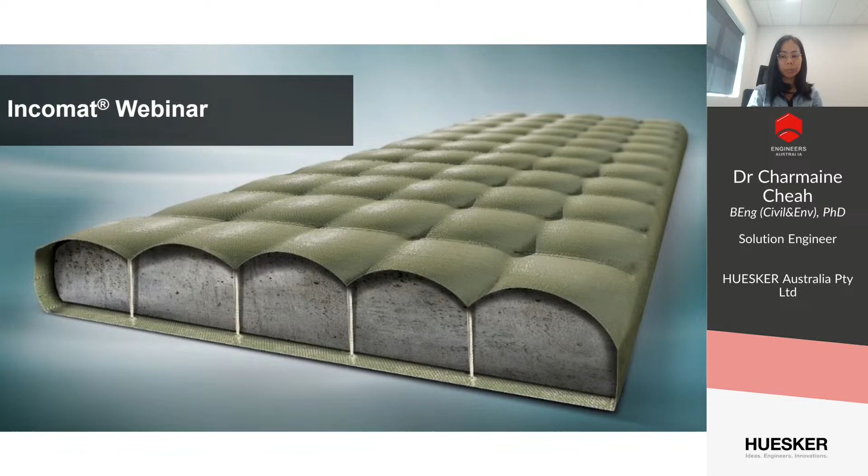So my name is Charmaine, the Solution Engineer for HUESKER Australia, and I have the pleasure to give you the first section of today's webinar for erosion, scour, and mechanical protection with geosynthetic concrete mattress.

And this is today's agenda. We will start with the basic information, explaining the different types of concrete mattresses, a brief introduction of the system, and then we focus on a presentation showing different applications with Incomat, for erosion, lining, slope, mechanical, and uplift protection. The presentation will then give some insights of Incomat projects executed around the world, followed by technical design examples. And if you have any questions, please type into the YouTube chat box.

So we do have a long-standing history with Incomat. Here you find an old book known as Plastics for Hydraulics, written by Zitcher in 1971. The book shares insights about the pioneering applications for plastics material, which now is commonly known as geosynthetics. What you see here is a concrete mattress that was produced by HUESKER in the early 1970s.

So we do have a long-standing history of more than 60 years with Incomat. Here you can see some projects from the 1970s. One of the oldest projects is the Canal Imperial that was installed in 1973. It is an irrigation canal with Incomat standard, and you can see its condition in 2000 and also in 2011.

Another old project that is currently in its service life is the Banter See in Wilhelmshaven. It was installed in 1977. As you can all see, the condition in 2008 is shown in both pictures at the bottom. So though geosynthetic concrete mattress has been installed for over 60 years, it still presents an unfamiliar construction element in the civil industry.

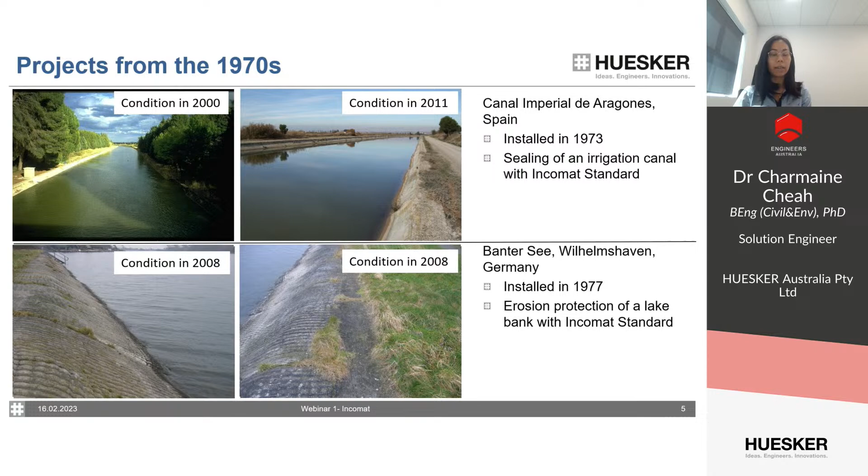So what is Incomat? As you can see, it's an in-situ concrete mattress. It basically comprises two basic components: a geotextile formwork and highly fluid concrete.

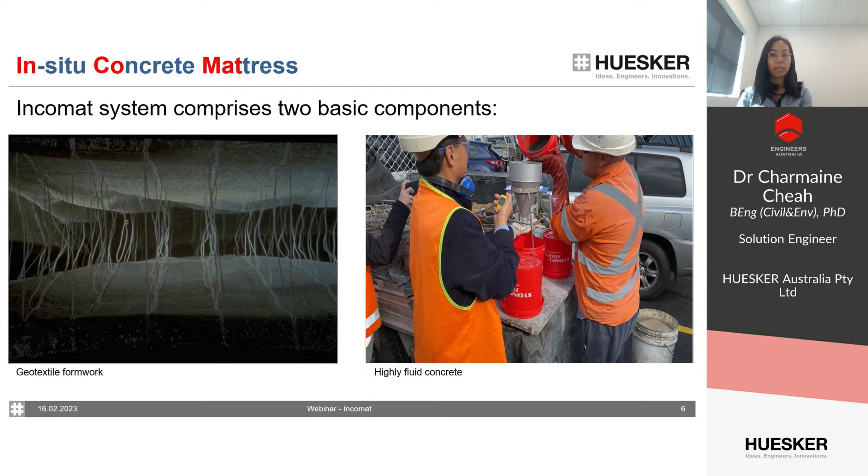What I do mean by highly fluid concrete - here you can observe the flow cone test. Highly fluid concrete is poured into the cone with a certain diameter, in this case 26 mils, and when it is released, the cone should be emptied within 5 to 6 seconds. There are different test methods to meet the criteria of highly fluid concrete. Alternatively, you can use an F6 consistency with a slump of 63 centimeters, or you can use a self-compacting concrete.

Now, you may wonder if there's only one type of geosynthetic concrete mattress. No, in fact, there are more than that. So let's have a look.

We have different mattress types. As you can see, we have Incomat Standard, Incomat Pipeline Cover, Incomat Flex, Incomat Filter Point, and Incomat Crib. Incomat Standard is the state-of-the-art lining and erosion control because it's an impermeable slab and also can provide erosion protection.

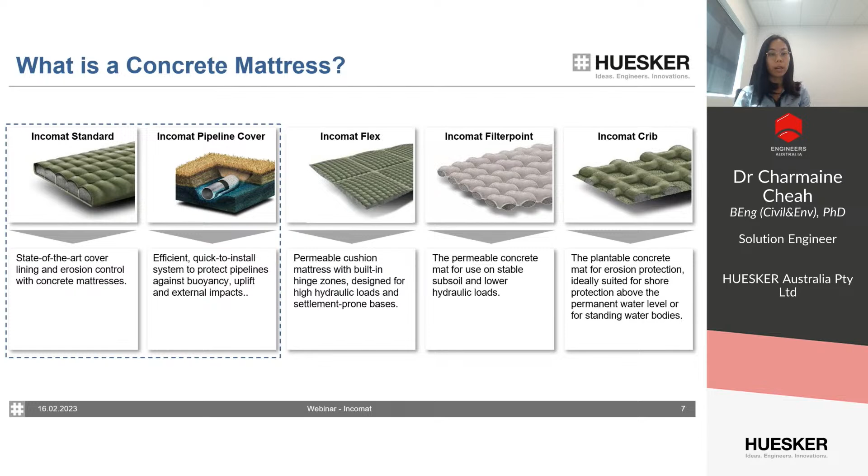Then we have the IPC system, which is made of the Incomat Standard. So we have the mechanical protection or buoyancy protection using Incomat Standard that's wrapped around the pipeline. And then we have Flex, Filter Point, and Incomat Crib. So how do we actually differentiate between the different products? Let's take a look.

There are two features mainly used to differentiate the products: with or without vertical ties. Both Incomat Standard and Incomat Flex have vertical ties which provide dimensional stability, and this space is then filled by concrete. Whereas Incomat Filter Point and Incomat Crib don't have ties, but have interwoven areas known as filter points.

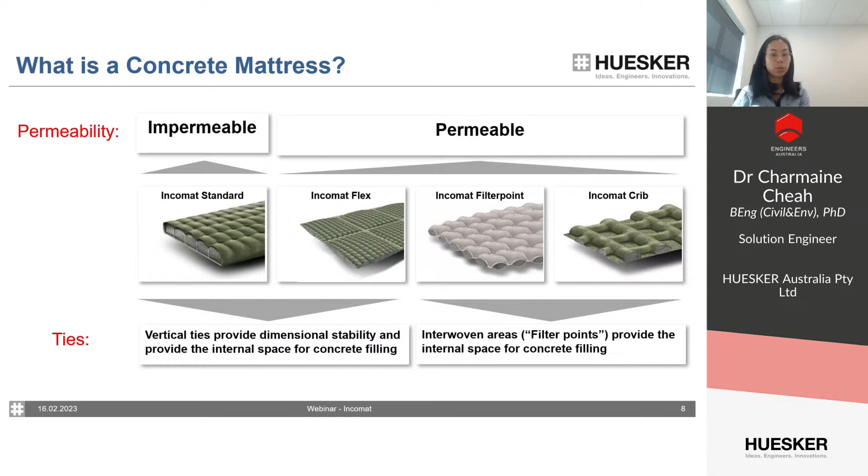Another feature that distinguishes the different mattresses is permeability. Incomat Standard is the only one that can be used for sealing. Test results show it has a permeability value of 3 times 10 to the power negative 11 meters per second, whereas Flex and Crib have filter zones which provide permeability and allow hydrostatic pressure relief.

So let's talk a little more about each product. Incomat Standard is available in a wide range of thickness, 8 to 56 centimeters. If a thinner concrete mattress is required, we are able to produce down to a minimum thickness of 3 centimeters. Incomat Standard is impermeable, as mentioned, so we usually use it for channels, irrigation canals, and ponds, as both erosion protection and sealing element can be provided.

Incomat Flex has similarity with Incomat Standard, but with vertical ties. It's in a pillow shape, as you can see, with filter point areas. It is also available 8 to 56 centimeters, but we recommend, if you have a steep slope, a range between 8 to 30 centimeters. Because if we increase the thickness more than 30 centimeters, we notice the pillow would sag. So for steep slopes, we typically recommend 8 to 30.

It's typically used for wave and flow loads, high hydraulic loads, and also for canals, slopes, outlet structures, lakes, and bank protection. Incomat Filter Point is a permeable mattress, with thickness usually ranging between 5 to 40 centimeters, typically used for canal applications, also overflow sections. It could also be used as membrane liner protection.

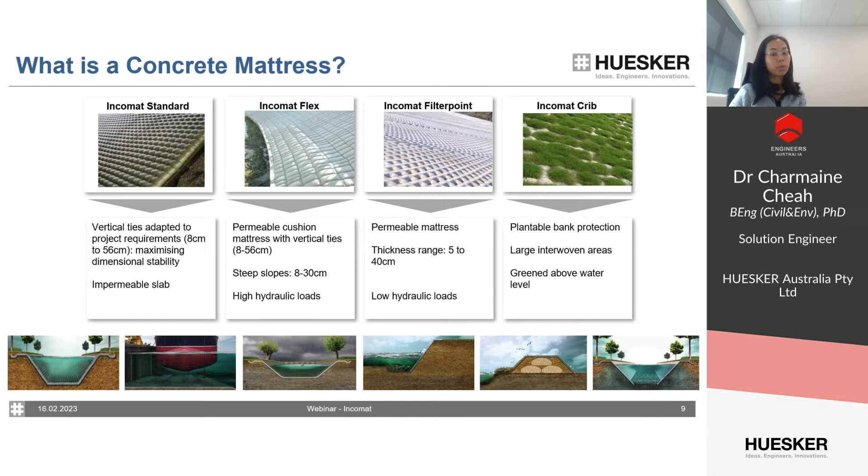The last product, which is a little more unique, is Incomat Crib. The main difference is that it can be vegetated. The large interwoven areas are usually cut off, and soil is placed into these areas. It is typically installed above water levels, and the most common application for Incomat Crib is overflow sections.

Now let's take a look at some executed projects across the world, along with some technical design approaches. First up, we have an erosion project in New Zealand, located in the central area of New Plymouth. The extent of the damage led the council to remove and replace the existing rock mattress with Incomat.

The robust filter point mattress was selected as the best alternative due to its simplicity in installation. The Incomat Filter Point was manually laid on the subgrade, as you can see. Then we used an inline concrete pump from a distance because there was no direct access for concrete trucks without significant disturbance to the surrounding vegetation. So the minimal machinery requirement for installation made Incomat Filter Point a superior solution compared to others.

Next, we have another project, erosion bank protection in the southern part of Taiwan, in Kaohsiung. It is an area characterized by tropical climate and seasonal heavy rainfall, and the existing open rainwater channel was concrete lined. Over the years the channel was subjected to erosion attack on the slopes and berms. Hence, urgent rehabilitation work was required.

Regular concrete fronting was not really sought after by the local authorities, as they wanted something more ecologically friendly as well as aesthetically pleasing. So in cooperation with the local designer, the bottom slope compound was made of Incomat Filter Point, which enabled the relief of pore water pressure. For the upper slope compound, the Crib mattress was selected because it could be vegetated.

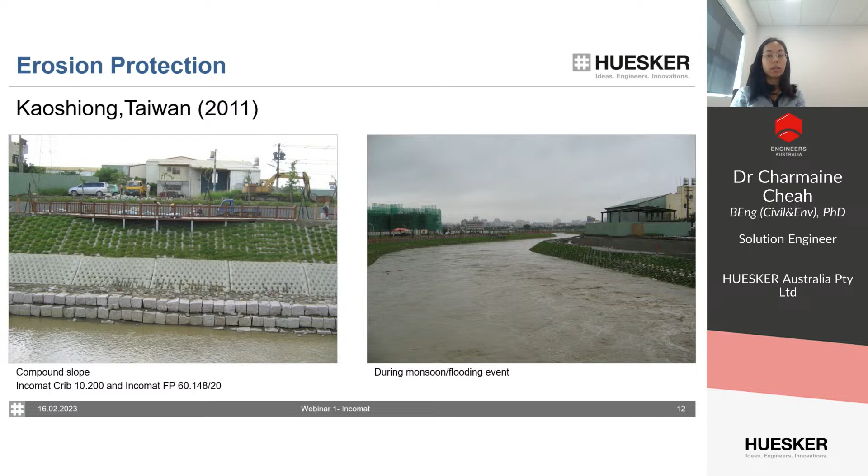During filling, you'll notice some excess concrete milk seeping through the fabric, but this actually increases the strength and durability of the concrete because there is a lower ratio of water to cement. Following completion of the first phase of the project, a typhoon hit Taiwan in August 2009, bringing heavy rainfall and causing the drainage channel to rise to the maximum, as you can see in the picture. Even under these extreme climatic conditions, the Incomat erosion protection performed extremely well.

Here we have another project done in Italy, an erosion protection system. The existing channel was subjected to weathering, and the erosion was affecting the stability of the surroundings. More importantly, the channel was often subjected to flooding, meaning it's prone to high flow rates. The project brief was to provide a constant thickness mattress that would prevent and resist high hydraulic flow. As Incomat Standard offers both sealing and erosion protection, along with simplicity to install, it was a superior solution to other options.

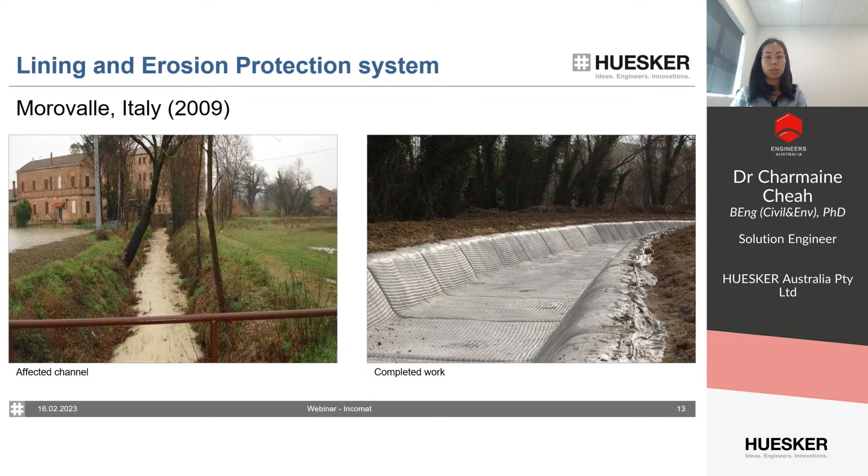So we've talked about a couple of applications of Incomat. Let's look at a design example for a canal lining. What is the required thickness for this canal? We have the flow as the input parameter, 2.5 meters per second, and we also have the dimensions of the canal. So which design method would be adopted?

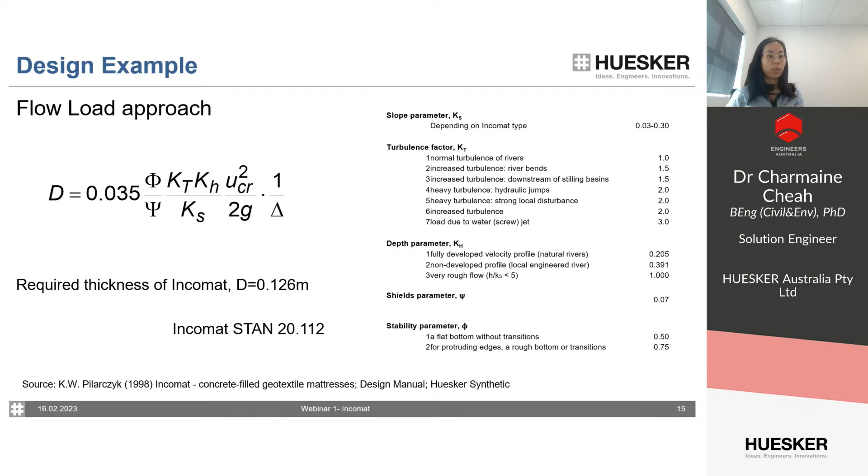Here we have a flow load approach from Pilarczyk. We need to take into account a number of different parameters, including the slope parameter, turbulence factor, depth, shield, and stability parameter. Once you've selected the right factors, you put it into the formula, and the required thickness of Incomat can then be calculated. In this case, the required thickness is 12 centimeters.

The next example here is a scour protection system for a bridge pier. The bridge you see here is actually a bridge that was completed in 1834. The suspended deck was replaced by a concrete girder in 1881, which was then replaced by a concrete deck in 1969. Note that the bridge pier still has the original elements of the original bridge.

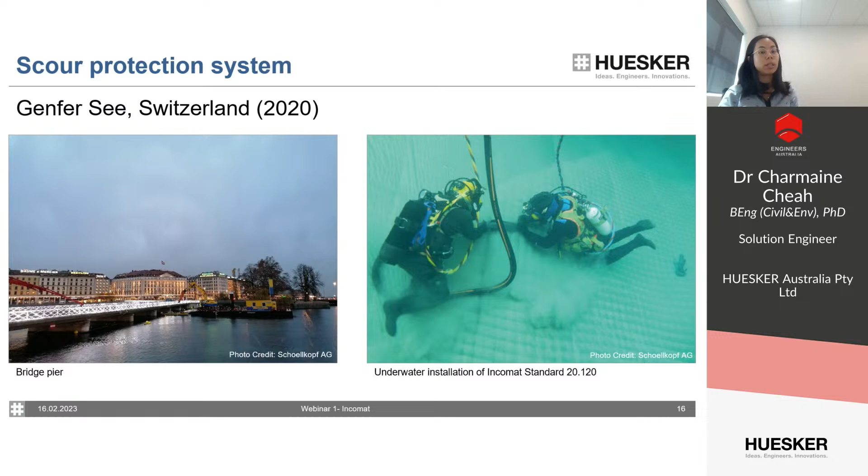Due to the high flow velocity, the riverbed area at the piers is eroding, endangering the foundation. Incomat standard with vertical ties provided a constant concrete cross-section under difficult installation conditions, making Incomat a superior system compared to other construction systems. Here you can see the bridge pier from the top, and also the underwater installation of Incomat 20.120 with two divers.

So how do we actually design a scour protection around a bridge pier? Let's look at a design example. For instance, taking a flow at 1.15 meters per second with a pier width of 5.65 meters.

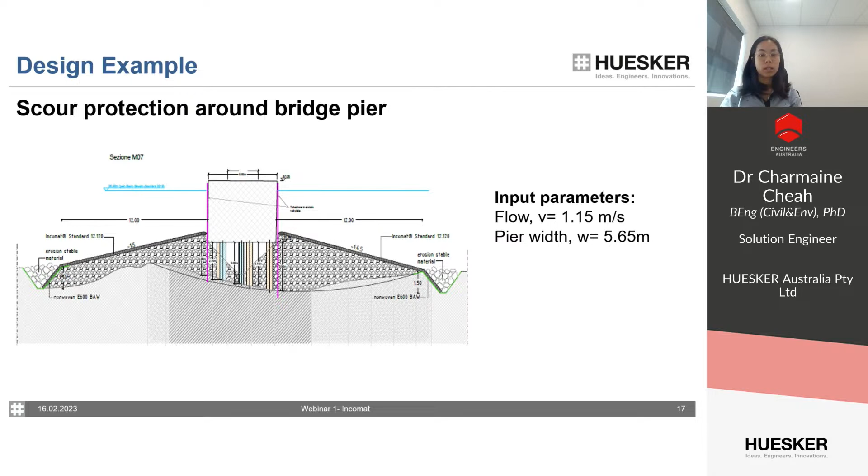This design is based on the Federal Highway Administration, FHWA. The scour protection width needed is actually 2 times the width of the pier, as given in the document at the bottom. So we know how wide we need to protect. What thickness do we actually need to design with?

Following this figure and knowing the design velocity and the stability coefficient, we can determine the mattress thickness. The flow velocity in this design was given at 1.15, and CL refers to the stability coefficient for turbulence at the bridge. For example, CL 0.23 refers to wide bridge piers, or 0.12 refers to normal riverbeds.

As you can see, because our flow rate is relatively low at 1.15, the minimum thickness is actually 200 mm. So even though the calculated value would give us less than 100 mm, the minimum thickness for bridge scour protection is always 200 mm.

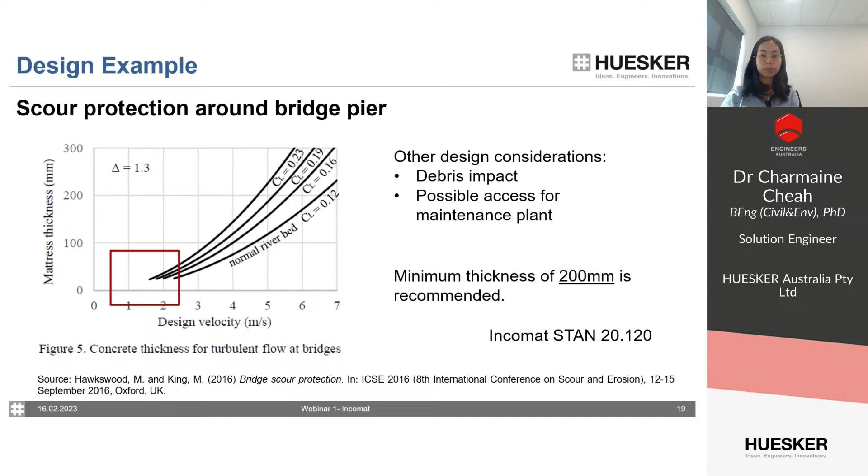Earlier I mentioned that Incomat Filter Point can be used as a membrane liner protection. This is an overview of the Qaisamani Dam. In 2016, a lining system was required to protect the dam in Lebanon. There were 3 design phases with this project.

Initially, the conventional approach was to construct a bituminous lining system, but such construction would require great effort as rollers would be needed to install the asphalt layer. In addition, given that the site is located in a cold region, the expected replacement period of the surface sealing would be lesser than the expected 10 to 15 years.

Hence an alternative approach was made to install a drainage geocomposite with an HDPE liner with granular fill. However, granular fill is not feasible, and it could be quite problematic for future maintenance and cleaning operations. So the alternative was to actually use Incomat Filter Point as a permanent protective layer.

You can see the overview of the dam, which has a volume of 130,000 cubic meters. On the other side, you can see the construction process, showing the setup of the installation with the drainage geocomposite, the HDPE liner, as well as the non-woven geotextile and Incomat Filter Point being installed on the slopes.

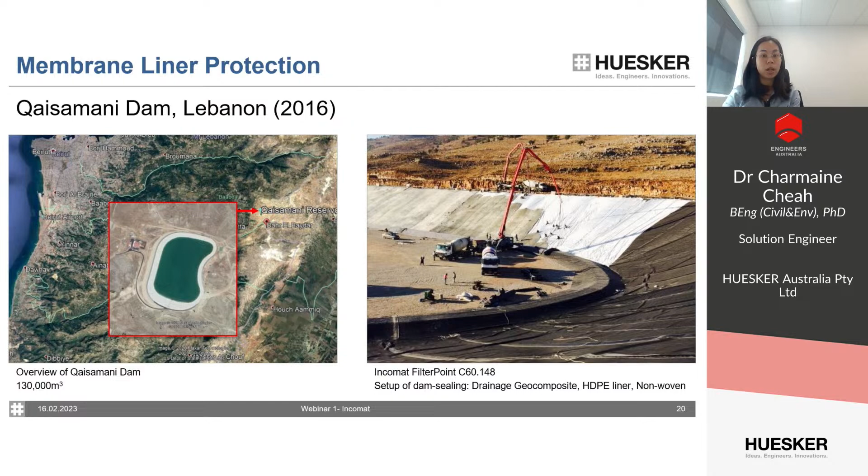Next, we have a slope erosion protection, or intake structure, done with Incomat standard. This is the largest man-made lake in Germany, 19 square kilometers, to be filled with 200 million cubic meters of water. This was created from a former open pit mine located at Cottbus in Germany. The flooding is carried out by the largest intake structure of Incomat standard with a 200 meter stilling basin.

This picture was taken during filling. As you can see, it was installed in 2017, and the first big picture shows the filling in 2019. The upper right-hand corner shows the initial phase of construction where Incomat was laid. The second picture is after the inauguration in 2018, where water was starting to flow in. The very last bottom picture is the top view of when the intake structure was completely built.

So you can see this is a very large open pit that is going to be filled with water.

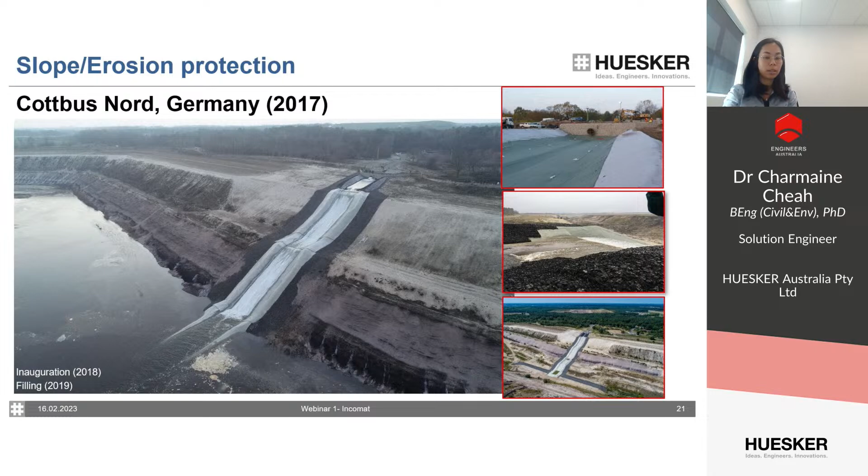So we talk about slope protection, and often we ask, what is the slope stability with or without anchoring? So following the DIN 1054,

the BAW derived minimum friction angles for subsoil for stable Incomat construction on slopes without anchoring. The results are shown in this table. As you can see, with the slope inclination, whether it's above or underwater, and what's the factor of safety being adopted, and the minimum friction angles for stable Incomat constructions without anchoring.

Also note that the friction angle of Incomat is also equal to the subsoil if the subsoil consists of loose sand, gravel, or crushed stone. Sometimes we have a non-woven geotextile that's placed under Incomat, for instance Incomat filter point or Incomat crib. Then the friction angle between the geotextile and Incomat would then be equal.

Mechanical and buoyancy protection: so Incomat pipe cover, as mentioned earlier, we have a system IPC, Incomat pipe cover, which we actually use Incomat standard to wrap around to have mechanical protection or buoyancy protection.

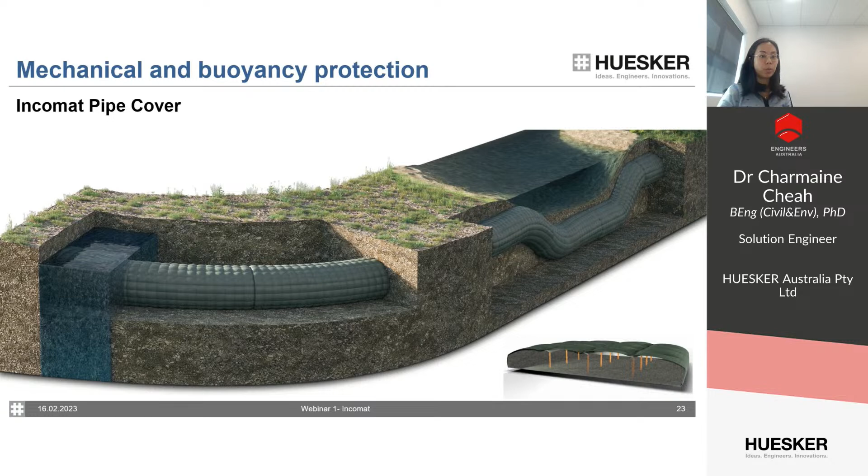Here you can see a project that was done in Germany, where IPC is wrapped around and also filled with concrete. This is a 2DN 1400 pipe for potable water installed across the River Ruhr.

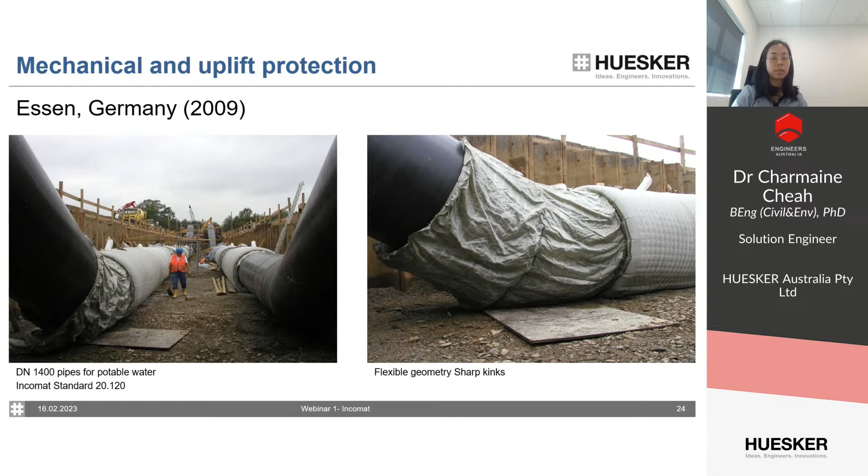For protection, Incomat pipeline of 20 centimeter thickness was chosen, and after the installation of IPC, the pipelines were floated into the river and sunk. The total pipeline that was protected was 92 meters, with a protected section of 54 meters. For the sharp corners, as you can see on the other side of the picture, customized IPC systems were installed. So next we have another mechanical protection project in France that was installed in 2017.

GRT Gas installed a new natural gas transmission pipeline between two cities in France in 2017. The pipeline diameter was DN 1200, and it was protected with IPC with a minimum thickness of 8 centimeters and an average of 10 centimeters.

So how do we actually design the required thickness for Incomat pipe cover? We need to know the input diameter, the external diameter, internal diameter, the density of the pipe, whether it's steel or HDPE, the coating if there's any coating, whether that's a non-woven geotextile, we need to know that, and then we calculate.

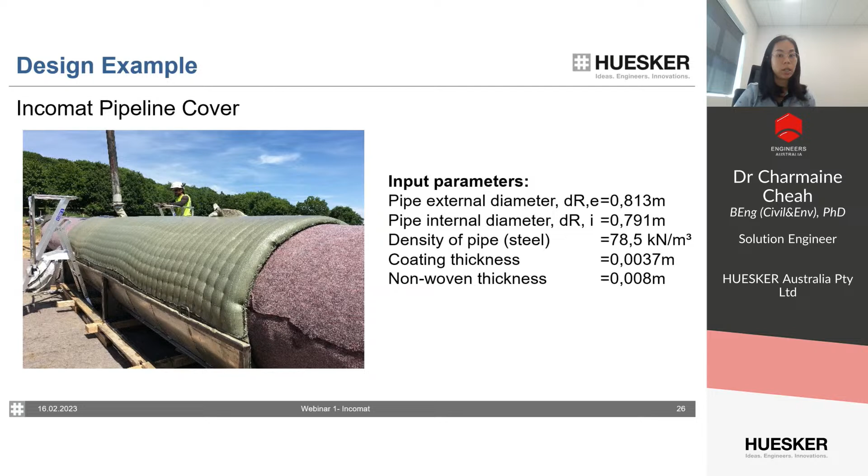An average thickness of 10 centimeters was used for this project. The required concrete weight force of the pipeline is derived by solving the equilibrium forces, so it's quite straightforward. Once you put in all the information, all your input values, you can simply calculate the value, and the required thickness is then derived.

What we're going to show you next is the preparation of how it's installed. How do you install an IPC? The filling operations of the IPC are relatively straightforward. Here is a 36-inch pipe encased with the IPC system, the pipeline is wrapped with the textile formwork, and then it's filled with highly fluid concrete through the inlets, which are sewn to the panel element.

Here you see a 5-meter element, which only took 7 minutes for installation. Obviously we won't show the whole thing, this is sped up a bit. So let's watch the video.

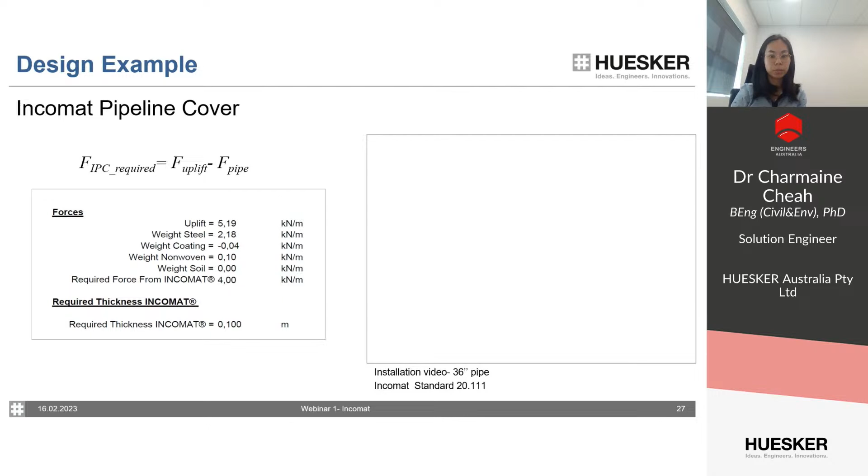So the most important question: what are the IPC advantages in comparison to conventional formwork solutions? Let's look at a project executed in France, a DN 900 pipe with 3 IPC panels with no curves. We'll look into capital investment versus installation costs.

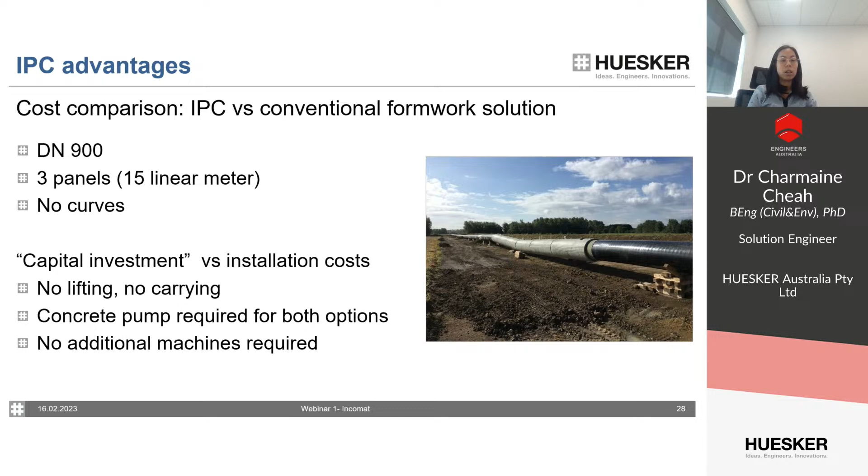With the use of Incomat, there is no lifting and no carrying. A concrete pump is required for both options, so that's the same. No additional machines are required with the use of the IPC system.

Comparing the costs of the formwork, IPC has a higher cost than wooden or steel formwork. It will be 90% cheaper if one uses the conventional method. IPC does require higher quality concrete than a conventional system, so one would save a third using conventional concrete, but nevertheless one would need to compare it to the installation speed and required labor.

How long does it take to install IPC? Approximately half a day with 3 workers, whereas with the conventional method you would need 2 days, 4 workers, and an excavator. No removal is required for IPC. For removal of the conventional formwork, it takes about half a day with 4 workers and 1 excavator. So the conventional method is actually 5 times more labor intensive compared to an IPC system. That's something to think about when you talk about capital investment versus installation.

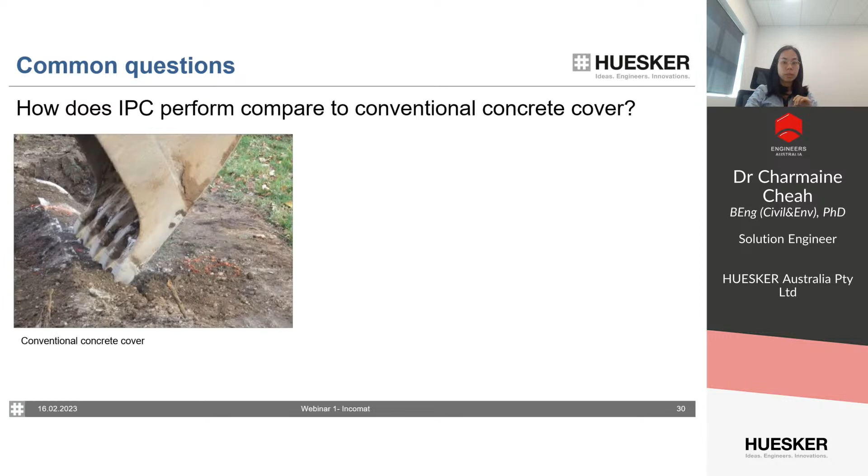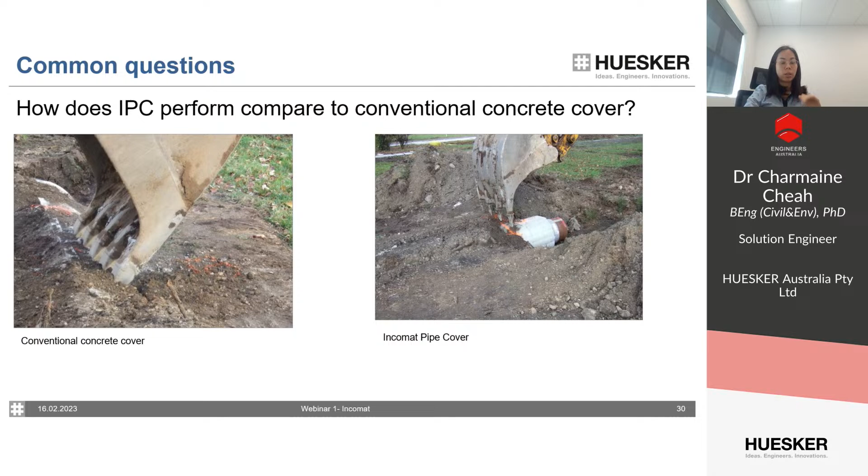How does IPC perform compared to conventional concrete cover? What is the impact resistance when you compare both systems? This is an impact resistance test done by GRT Gas in 2006. They used a backhoe and tried to penetrate the concrete cover. The results can be seen in the following pictures. In the first one, the conventional concrete broke apart into pieces, whereas on the other side, the integrity of the IPC is still intact. That answers the question of how IPC performs - it performs much better than a conventional concrete cover.

Another common question we often get is, does the IPC affect the natural potential of the pipe? No, it doesn't. The natural potential of the pipe was measured on the built components 3 months post-installation, and as a result, the IPC does not affect the natural potential. We also have the report if required.

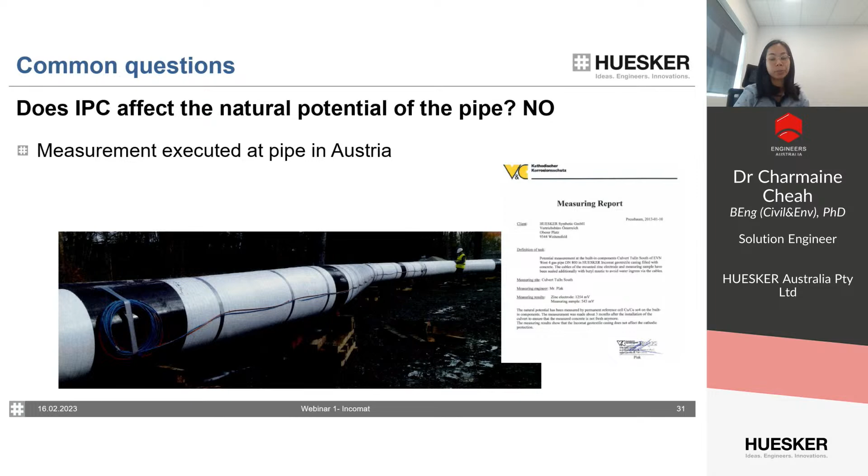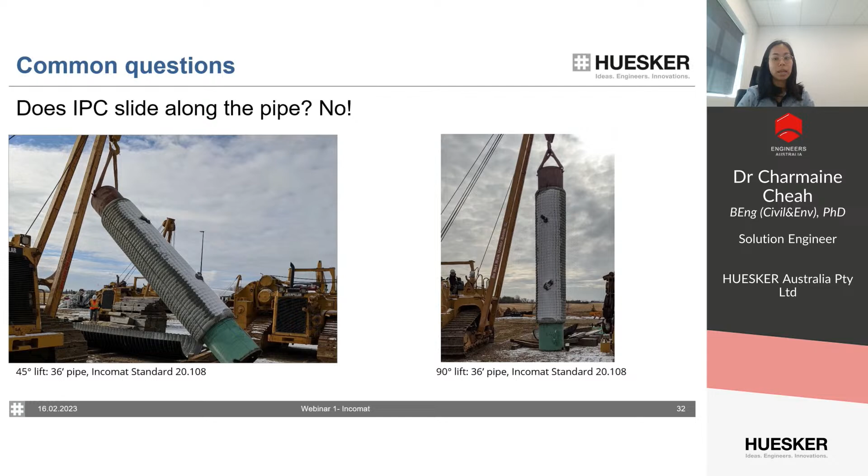Another question: does IPC slide along the pipe? No, it doesn't. Cross-country infrastructure in Canada did some lifting trials. It was proven that the nicely fitted IPC system does not slide. On the left-hand side you see a 45-degree lift of the same pipe, and on the right-hand side a 90-degree vertical lift for more than 10 minutes. They also made markings to check for movement, and there was none.

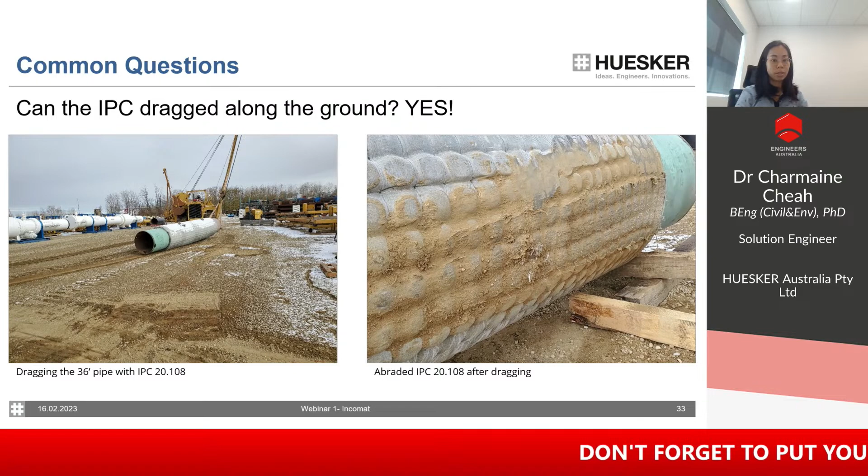For the same pipe, we also did some dragging tests. Clients often ask, can we drag along the ground? Yes, we could. The same pipe was dragged along frozen ground in Canada. On the right-hand side, you can see the abraded section of the concrete encasement after the dragging operation. Please note we didn't drag the IPC, we dragged the pipe itself - so this is the abraded look after dragging.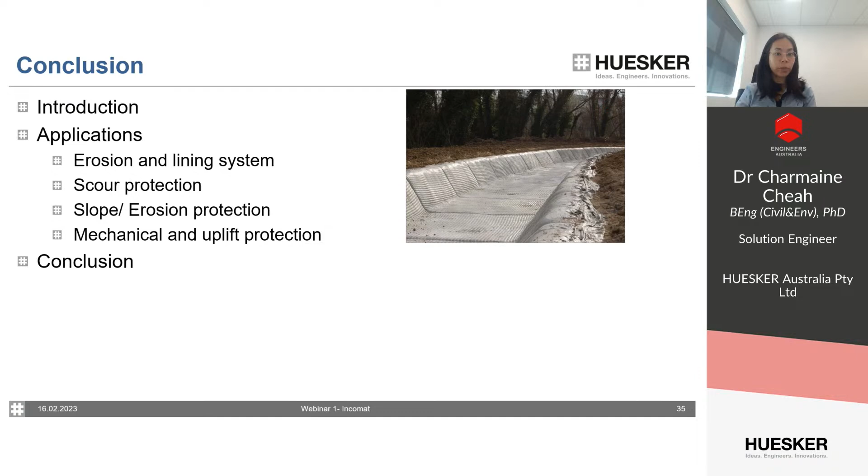In conclusion, we started with the geosynthetic history from the 1970s, followed by the different types of Incomat mattresses - the Incomat Standard, Incomat Flex, Incomat Filter Point, and Incomat Crib that could be vegetated. We then looked at different applications: erosion and lining systems with canals, scour protection with bridge piers, and mechanical and uplift protection for IPCs. We also looked at different approaches, such as the fluid approach from Pilarczyk and FHWA, and lastly discussed the IPC system itself and its advantages against conventional methods.

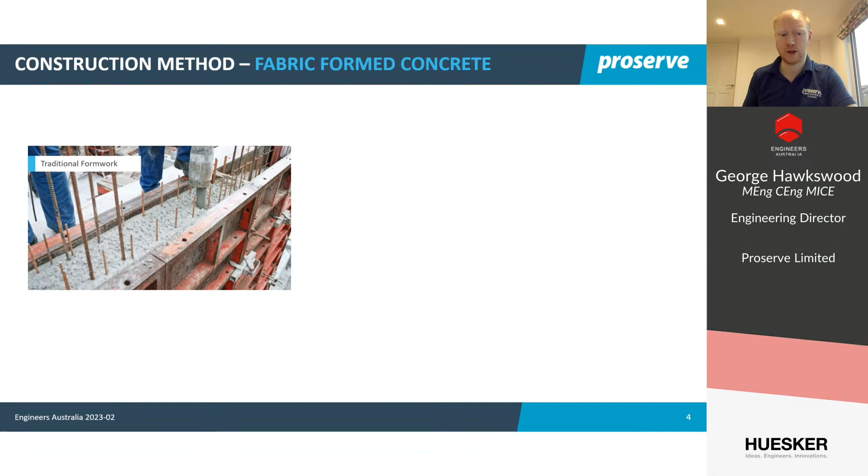I'm going to start by summarising what fabric-formed concrete is, starting at the very beginning. I'm sure we all have a good understanding of traditional formwork and how it shapes and molds concrete, that it's rigid, gives shape to the concrete, and doesn't have any function in the permanent works. It's the concrete that does the job. It's very similar for fabric formwork.

However, fabric's a purely tensile structure, so it can only give shape to the concrete when it's fully filled. But again, it's temporary in nature, and it's the concrete that does the work for the permanent one.

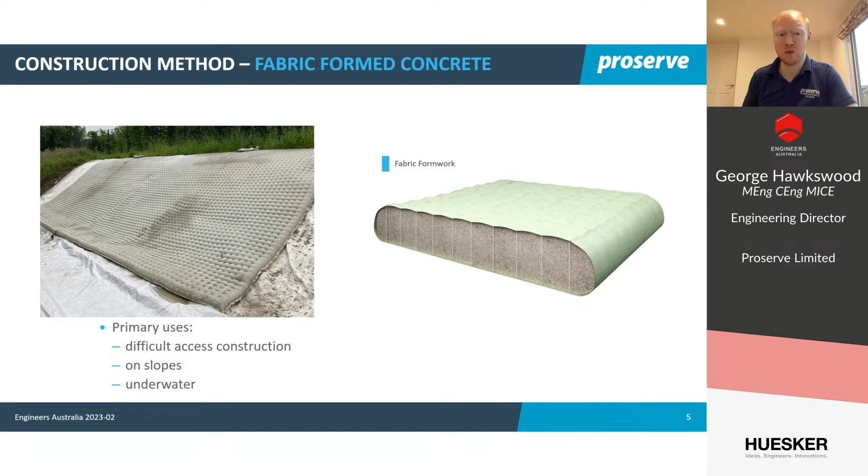Fabric formed concrete is best used whenever traditional formwork is impractical, slow, or difficult. So generally we find ourselves working in areas where you need to form a continuous thickness slab on slopes, or areas of difficult access, such as underwater or down tunnels.

As I've mentioned, it's all about the concrete, so might as well focus on that for a moment. Fabric formed concrete allows us to create highly durable concrete. The concrete is pumped into an already positioned concrete mattress. The mattress fabric itself is permeable, allowing excess air and water in the formwork, especially underwater, to escape. The pressurizing of the concrete, being more dense, creates a very dense matrix inside the mattress, producing very high strength concrete with high surface abrasion resistant properties.

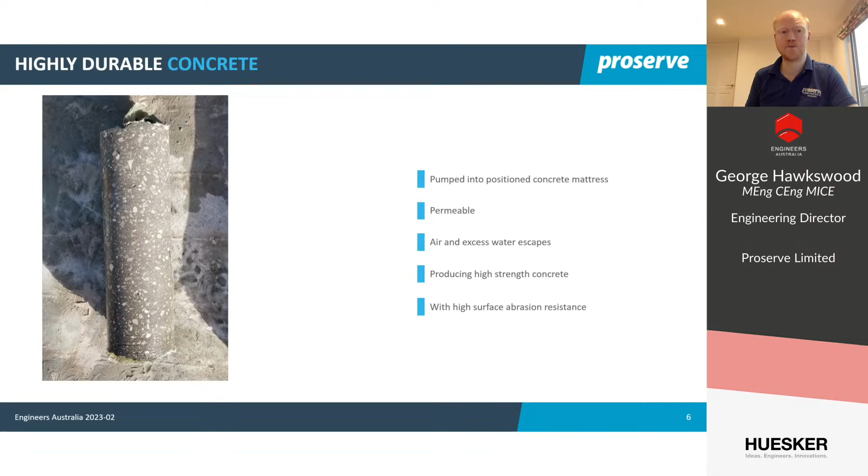Using fabric formwork, I've talked about the water coming out of the mix, so it's useful to point out that when we're pumping the concrete, it's got a water cement ratio of about 0.55, which after curing in the concrete mattress drops to about 0.4 after that excess water bleeds out through the mix.

So what is a concrete mattress exactly? Well, it's two layers of fabric, a top fabric and a bottom fabric, separated by what we call thickness ties, which are of a predetermined length at the weaving stage. They limit how much the two fabrics can move apart, and that gives the mattress its thickness.

Woven thicknesses are available up to about 600 millimeters. Where we're positioned in the market, I think we're the only company in the world that doesn't weave or install concrete mattresses ourselves. So we're free to buy the fabric from whoever, and we buy the concrete mattress from HUESKER. It's the most reliable mattress out there on the market, so when we're going underwater in places difficult to access, we can really rely on its engineered properties.

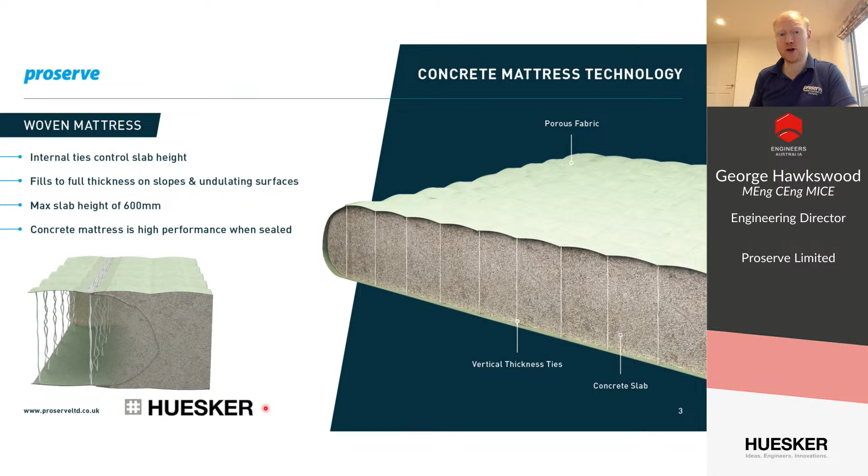Then we engineer the mattress, cut it, shape it, add restraint, etc., so that it's suitable for the conditions it's going into, and we train contractors how to use it. So we go to site to train them in that.

There's a few videos here just showing how concrete mattress works. On the right-hand side, we have a filled piece of concrete mattress and an empty piece that's been zipped on. I'll play the video and we'll show it filling. You'll see that it's a very fluid concrete mix that fills it, tensions the fabric, gets those thickness ties tight, and you know that the fabric's completely filled.

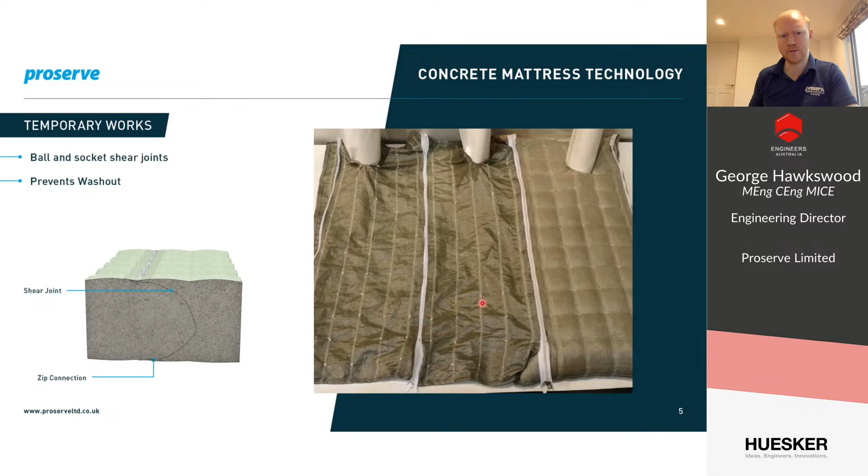I'll play the video one more time. This time I want us to focus on the joint between the two pieces of mattress. You can see the first one filled has a convex shape, and the next one to fill around it will fill intimately around that shape, creating an interlock joint. We call this a ball and socket joint. In this next image, you can see that joint and how the two panels are interlocked, maintaining the thickness of the mattress across joints.

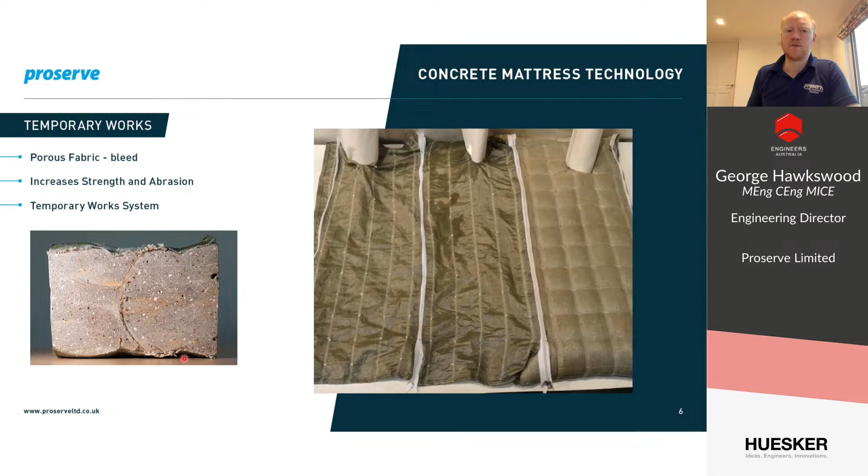But primarily, it's coming from propeller scour. This can be container ships with 10-meter diameter propellers, or ferries, etc. Azipod propulsions have really come up in the last few decades, primarily on cruise ships, being able to point in any direction and, having quite high power, create scour in different locations.

Bow and stern thrusters generally create scour on slopes and hitting vertical walls. It can also be wave and current action, or fast ferries with jets. The Incat vessels fabricated in Australia have jets that generally point along the surface with very high power, but when reversing, they point down towards the bed and can lead to some interesting scour patterns.

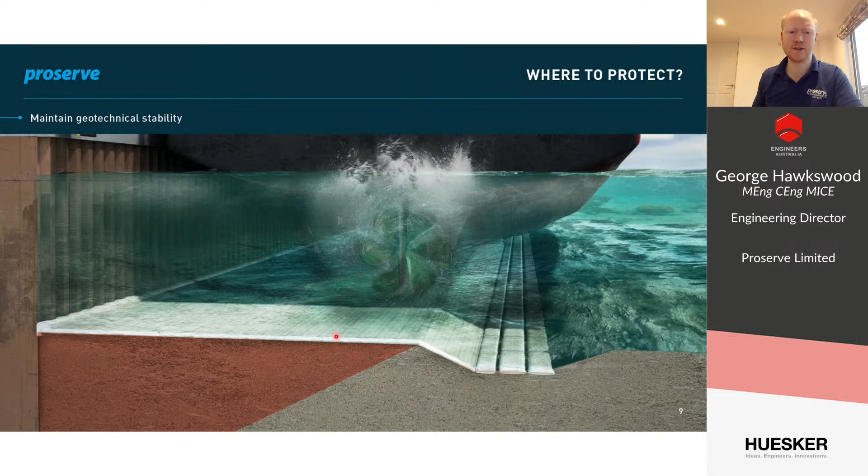For an embedded retaining wall, the name of the game is to protect the embedment of the wall and the passive wedge that supports it. This is supported by the PIANC guidance used for design, which gives some rough guidance saying 5 meters past the propeller, but really that's analogous to protecting the passive wedge of the wall.

For pile jetties, again we want to protect the geotechnical stability of the structure. It's maybe not a perfectly drawn slip circle, but we're looking to protect against global slip failure by avoiding erosion at the toe and also local erosion at the piles.

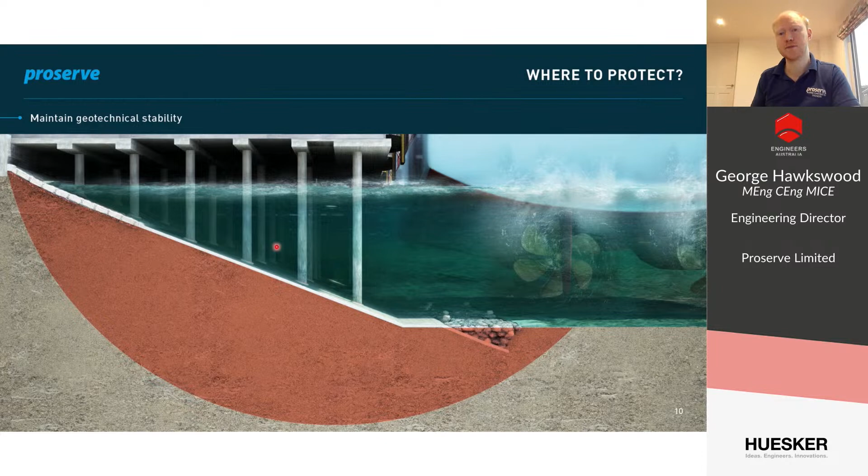I'll start by focusing on scour protection for quay walls. There's a traditional method of scour protection, which is placing rock, and as vessels get ever more powerful and ever deeper in draft, the rock required becomes much larger, sometimes in excess of 2 layers of rock over 2 meters in thickness, plus the bedding layer beneath. That adds up to quite a lot of dredging.

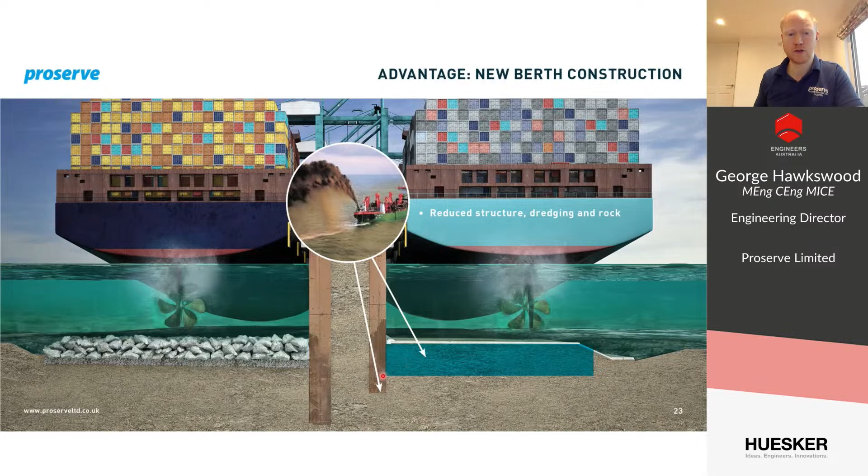But you can get the same performance from a concrete mattress with much thinner protection, maybe just 300 millimeters instead of 2.5 meters for rock. The advantage is you can take this into account at the design stage and reduce the amount of dredging and the amount of structure required, because your retained height is reduced greatly, so you can save cost on the initial construction.

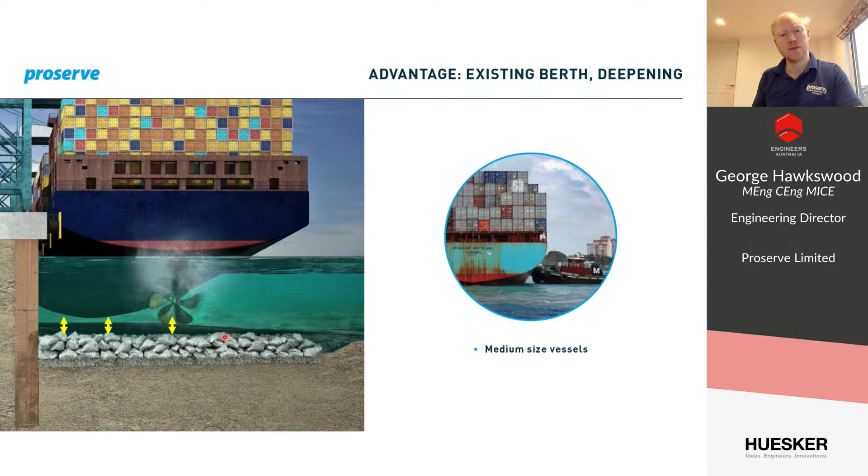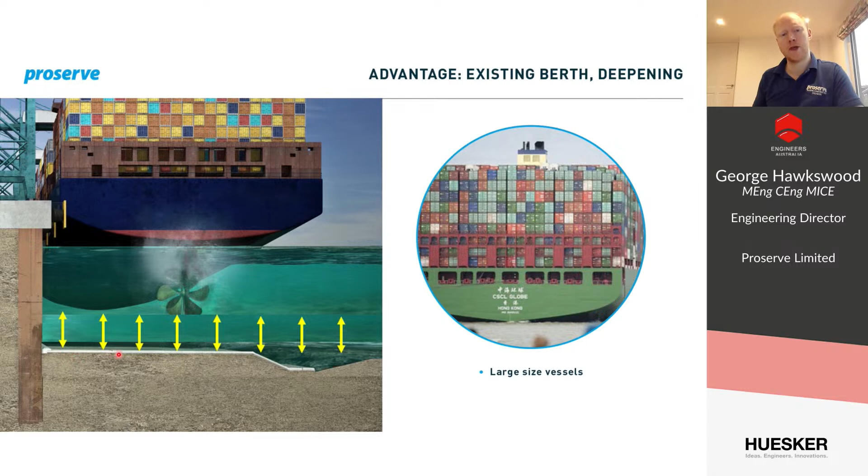Or for an existing berth that maybe has rock protection at the moment, or has a lot of scour allowance with material that hasn't been dredged, and you've got medium-sized vessels visiting the port, then you could take out that rock or dredge deeper down to the comfortable limit of the wall, and install the mattress to protect the passive wedge that remains and ensure no scour occurs.

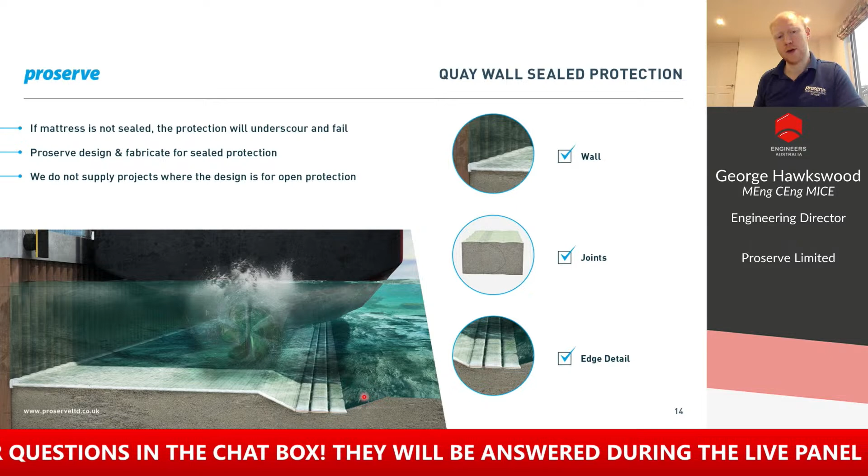When we talk about no scour occurring, we can be confident about that with concrete mattress because it's a completely sealed system. We seal to the vertical wall. I've demonstrated how we create this interlock seal at the joints, and then we make sure the edge detail is robust enough and located in the appropriate location where it won't get underscoured before maintenance can occur, just locally where it's needed.

So we will always design, fabricate and train the contractor to install concrete mattress in this sealed manner, so there's no erosion whatsoever through the plane of the mattress. We won't supply if there's a project where the design is for open protection.

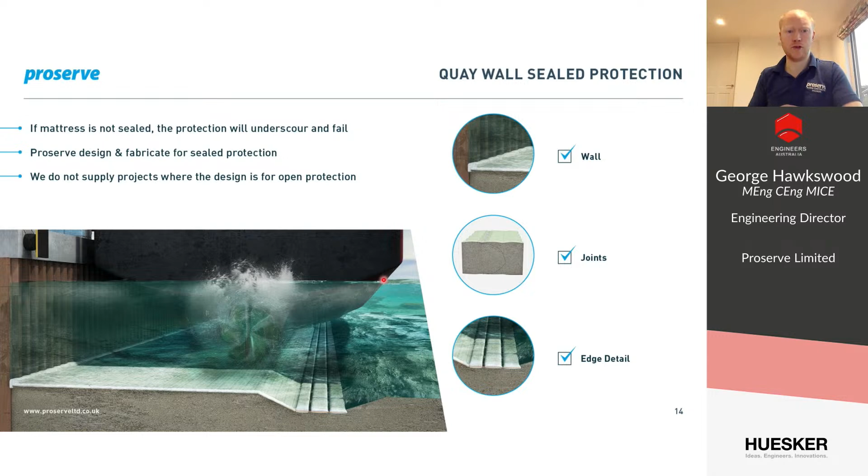The difference between sealed and open: looking through the joints, a continuous concrete slab means no erosion through the plane of the mattress is possible. At the edges, we're looking for no erosion to go under the mattress, so we'll use one of two or three methods to make sure scour can occur near the edge without the edge itself being eroded.

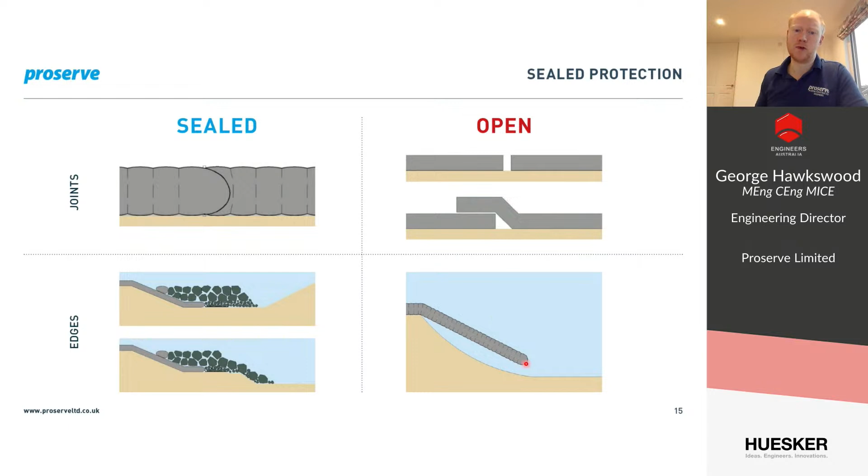Open protection, by contrast, can be things like precast block mattresses or in-situ mattress installed with gaps. This allows erosion through the plane of the mattress and allows flow to get in between the edges or the joints. The joints can be overlapping, but flow can act on those edges and create suction uplift, or get under the edge and cause failure.

So how can you design concrete mattress? We've talked about the position with a very, very light touch, so if you need more information, please contact us.

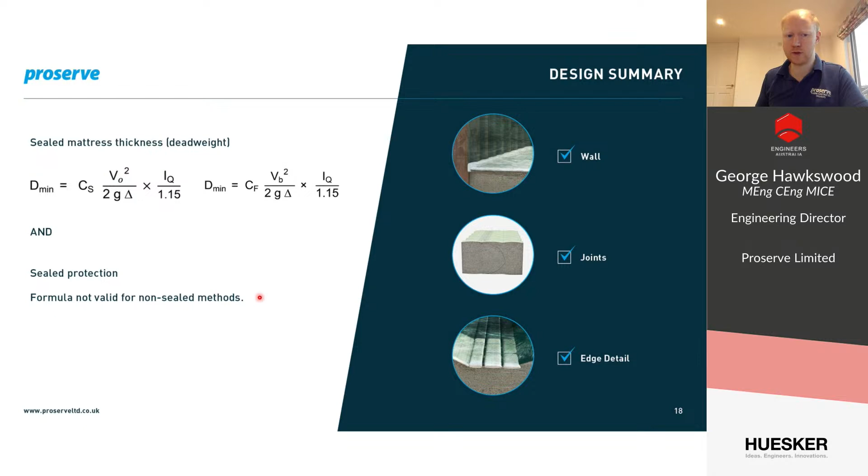In terms of the thickness of the mattress, there are two effects happening: the suction from the propeller, which is the rate of change of momentum across the propeller creating suction, and also the suction generated from the flow touching down onto the bed. You take the larger thickness required from both of those equations. Usually in this circumstance it's dominated by the suction equation, and you design for it to be sealed protection. These formulas are not valid for precast block mattresses or other non-sealed forms of protection.

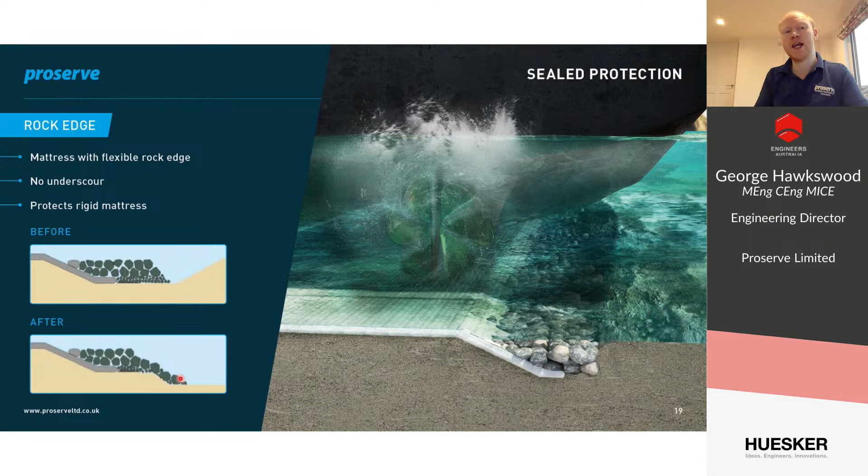So just to talk about the rock edge and how important it is, it's really important that we can protect that edge from underscour. We've positioned it deeper so that the rock can be stable in the flow that it will experience, and it's away from the passive wedge, so it's in an area where we can now excavate. Now, scour can occur, and our maintenance regime of inspections every 6 or 12 months can then identify any areas where the rock apron is getting depleted and maintenance is required.

A few years ago, 3 years ago now, we had an inquiry from Sydney where we couldn't get a rock edge to work. So we put our heads together to figure out what we could do to create an acceptable edge detail, and we came up with what we call the hinged edge block edge detail.

These are 5 tons each, and the idea is that when the scour occurs, they can rotate and drop to a point when you can then place rock that's of an appropriate or available size, and it won't impinge on the draft of the vessel.

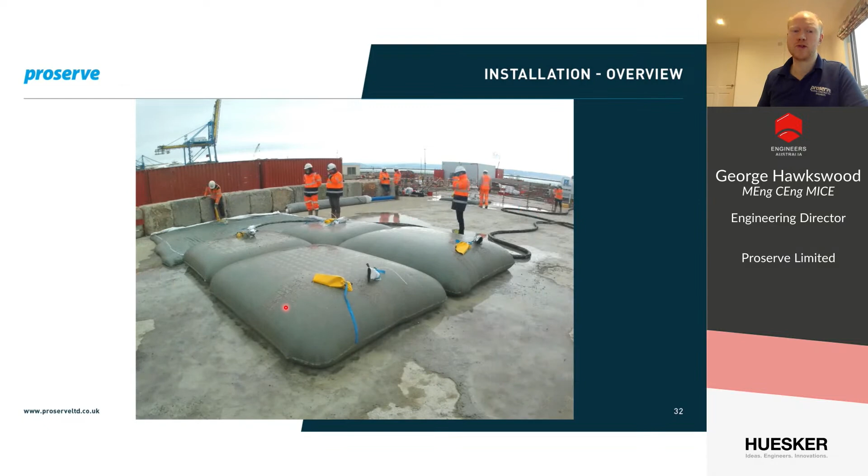So these blocks are extremely heavy, and they can't be flipped or rolled up by the propeller action. They're designed to be stable in that flow.

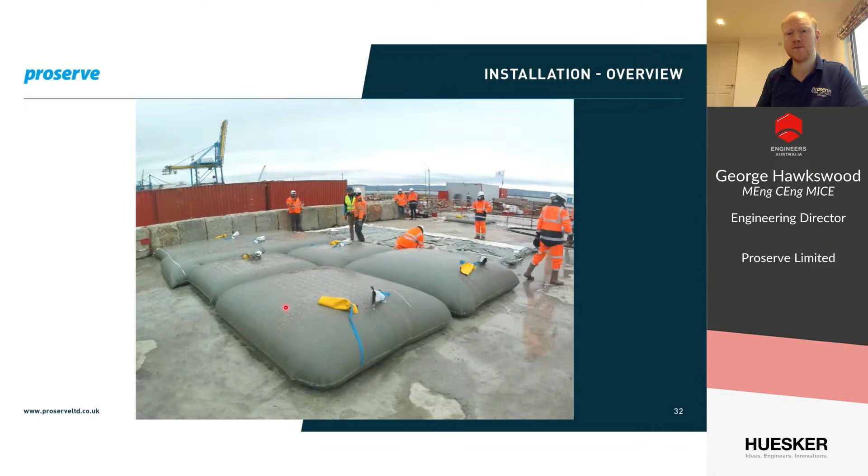There's different types of edge detail. I'll leave these here mainly for reference, but this shows how they can be constructed, what they look like when they're scoured, and how they can be maintained. Every edge detail of every mattress needs to be maintainable. That's a really key point, because we're never quite sure how the vessel is going to be used or where the scour is going to happen. We take our best guess, but we need to have that surety of being able to go in and maintain it so that it can't get underscoured.

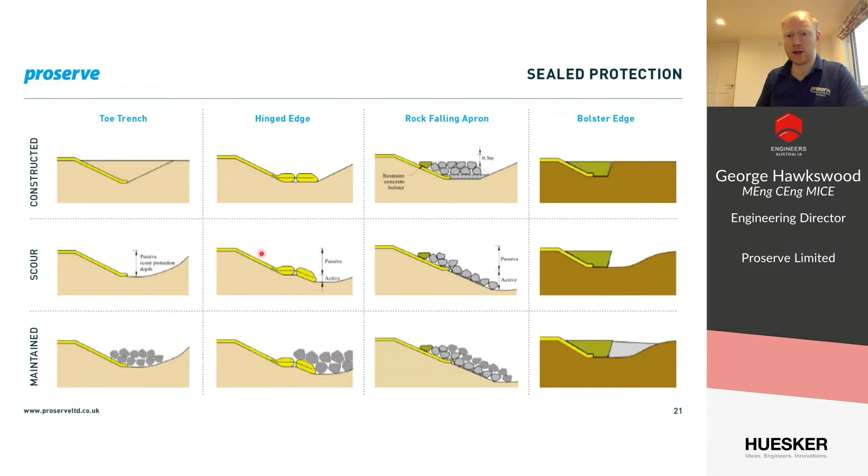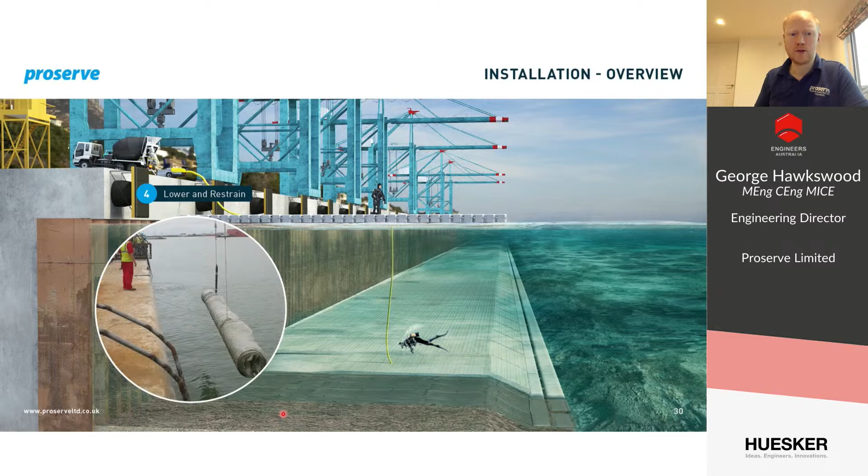So how is concrete mattress installed? Well, you have a pump and a concrete wagon on the surface for the fluid mix. You dredge the bed nice and level with your toe trench, prepare the mattress on a roll, drop it down to the diver so that he can connect it to the wall.

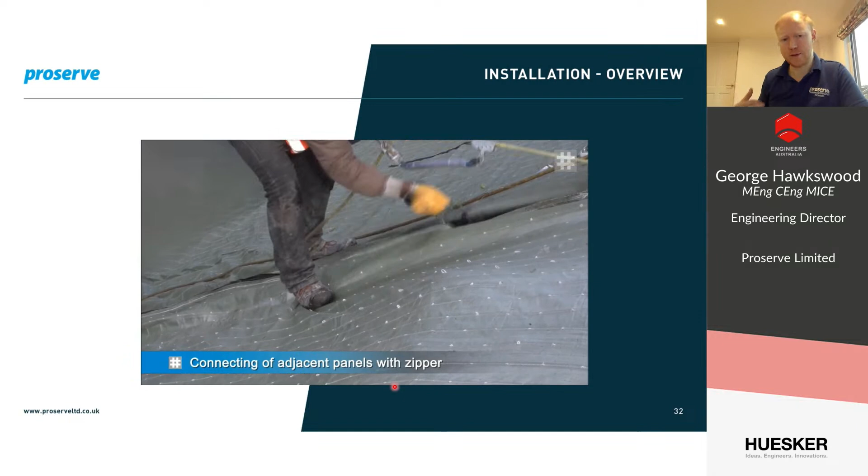He rolls it out and zips it to the previous mattress, which is similar. We don't have good videos from underwater, unfortunately, as it's usually a bit dark in ports. It's a relatively simple process for the diver to do once you've got the two pieces of fabric next to each other.

And then it's pump filled from the quayside, just with the pump and the concrete truck. We always start at the lowest point and work in tremie fashion back towards the wall, and we have particular methods to make sure that the mattress is full everywhere as you progress, to make sure that there's no areas of under thickness.

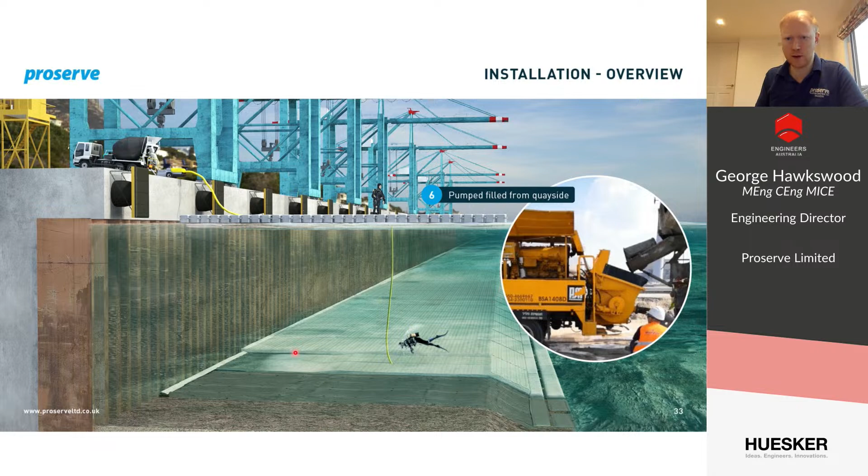So where have we done this before? Well, in terms of finished projects, we finished one, and I'm just finishing a second one in Ashdod in Israel. This was quite a large new build container terminal. The one we're working on at the moment is an existing container terminal where they've really appreciated the solution and what it can do, and they're employing it more widely.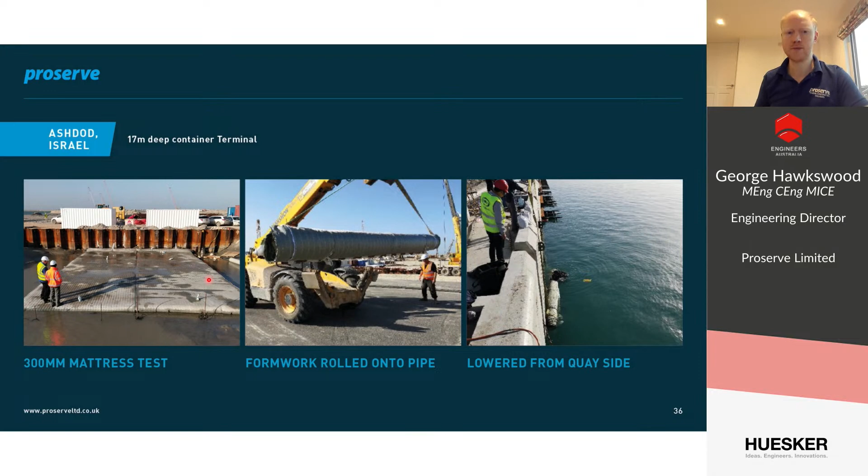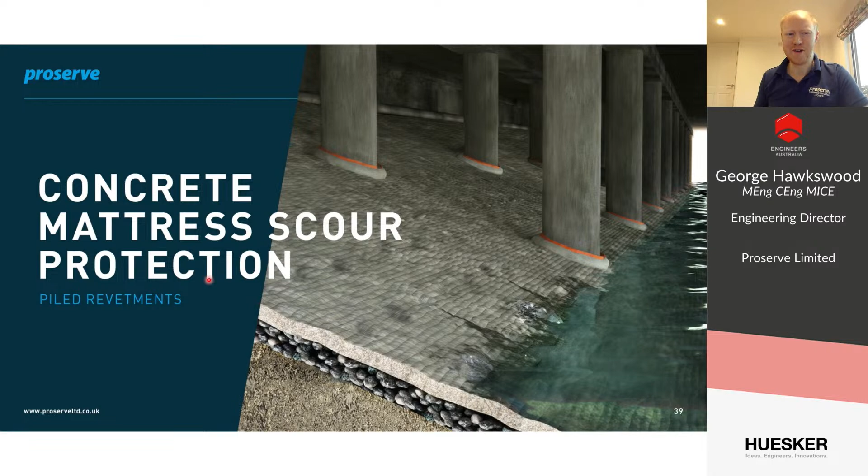Okay, conscious of the time, so we're going to move on to the piled jetties, piled revetments. Here it's a very similar process, just a few more complicated elements, like the mattress coming up through the intertidal zone now, and we've got piles puncturing the plane of the mattress.

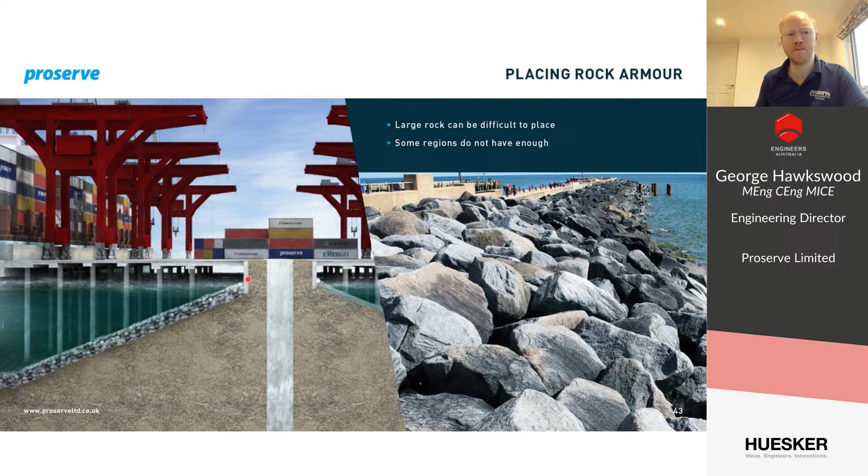Often, traditionally, rock has been used on pile jetties, but depending on where you are in the world, you can't get rock of an appropriate quality at an effective price and practicality, and it can be difficult to place. So in terms of the construction sequence, you have to place the rock after piling before you start work on the deck superstructure, so it's on the critical path.

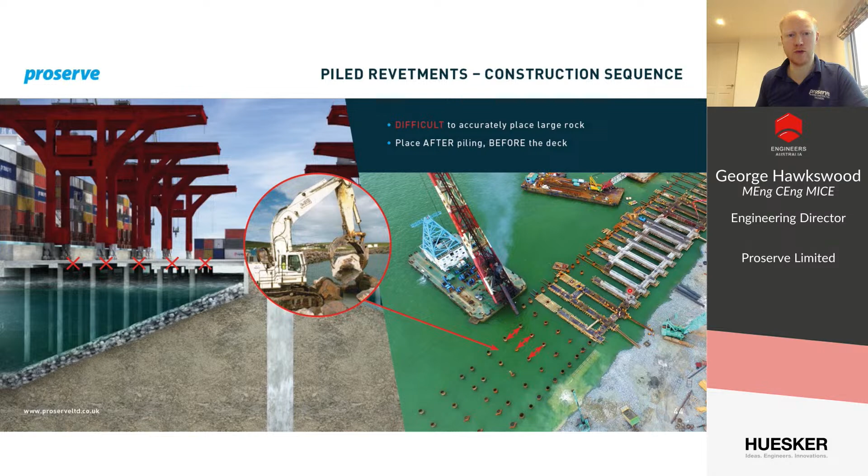With fabric, it's a bit simpler because you can place the fabric around the piles and clip it onto the piles with the decks in place. Before the deck's in place, you've got a lot more flexibility, so you can take it off the critical path.

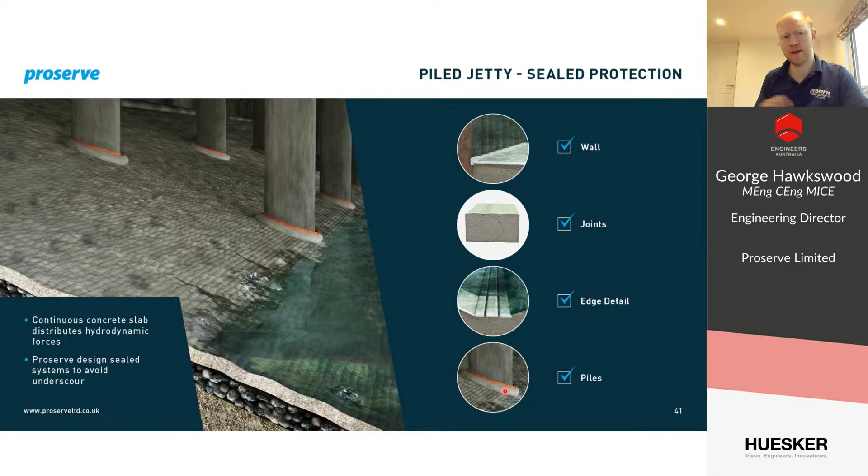Again, here we're focusing on sealed protection, so no erosion through the plane of the mattress. Seal at the wall, the joints, the edge detail, and then now as well the piles to make sure there's no erosion.

Because we're in the intertidal zone, there's a need for some porosity to be incorporated into the mattresses. So we place a filter layer beneath the mattress, size the thickness of the mattress to resist the wave uplift, and have a lot of porosity factored into the mattresses so that they can release that pressure.

The mattress installed can be installed below the deck, so that it can allow a land infill method of construction, so the piling can take place from a land berm, and then that can be dredged out. So this mattress allows a lot more flexibility in construction than any other method. Precast mattresses are going to need cranes, same as rock, etc.

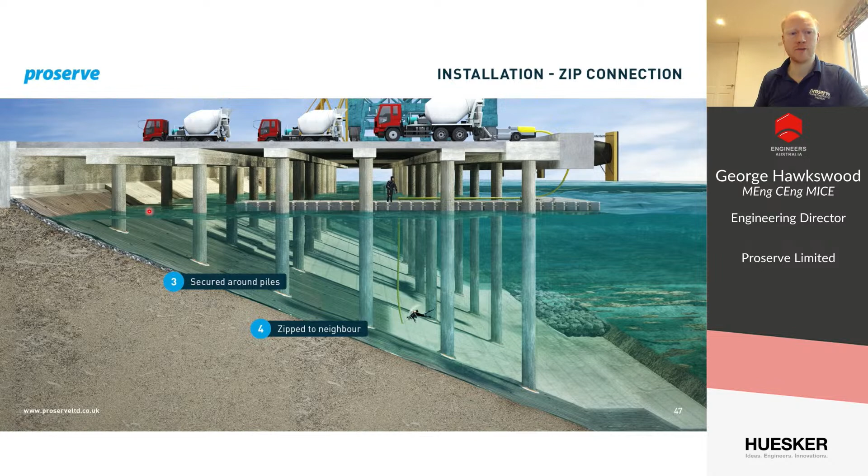Significant program advantages available to using concrete mattress. The mattress can be floated over and lowered much in the same way, just on a bit of a slope this time as before. It's rolled out and connected to the piles, zipped onto its neighbour, and then the diver fills from the surface just as before.

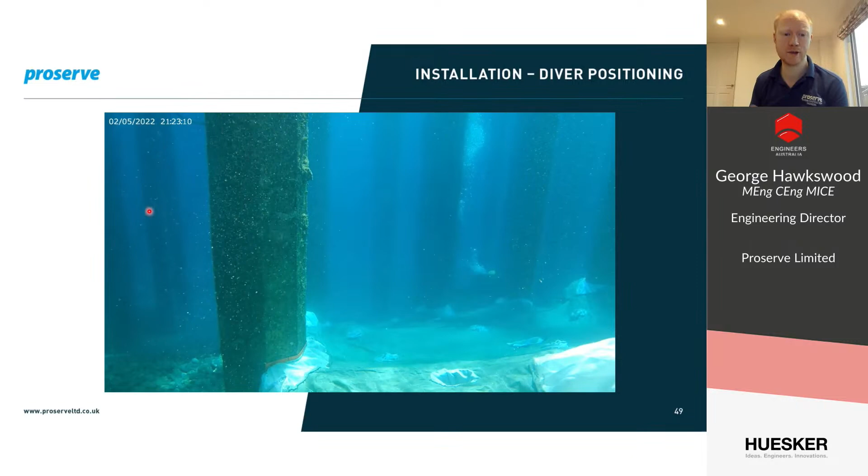So here's a video, some crystal clear waters. The diver's rolling the mattress down the slope, taking the bottom of the mattress and connecting it to the piles. They're going to come back in a moment and connect the top of the mattress to the piles before they fill. So now the mattress is empty, but it's completely connected to the piles. When it fills, it will push tightly onto those piles, creating sealed protection.

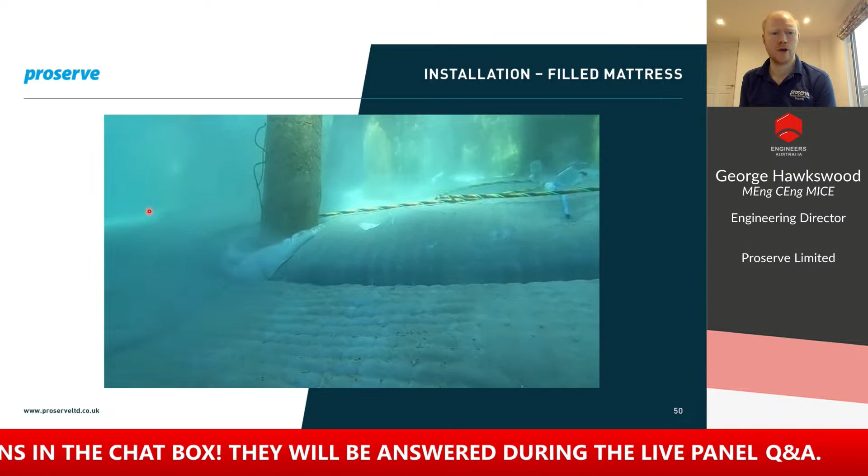And this is a video of what it looks like once it's filled. So on this project, we had a few increases in thickness as we went up the slopes. That's a change in thickness you can see there. You see the concrete pushing tight against the piles, porosity holes, and another change in thickness as you get right up into the wave zone. So this one was actually very thick, over 0.5 meter thick in that topside, with the porosity holes incorporated in.

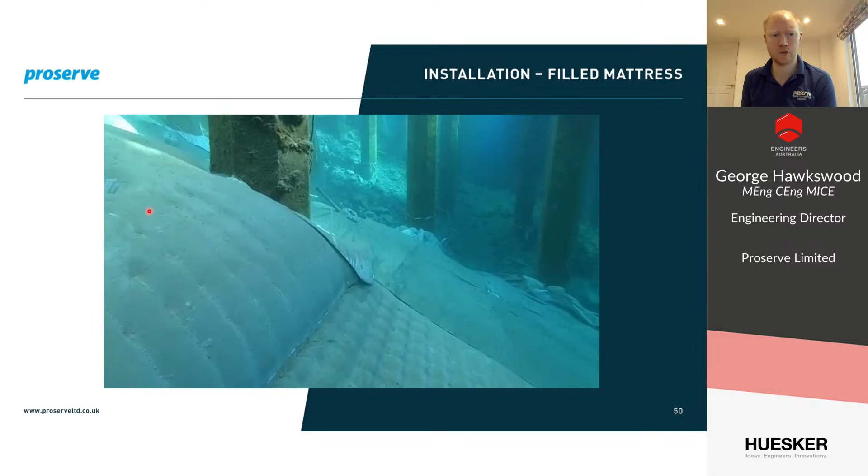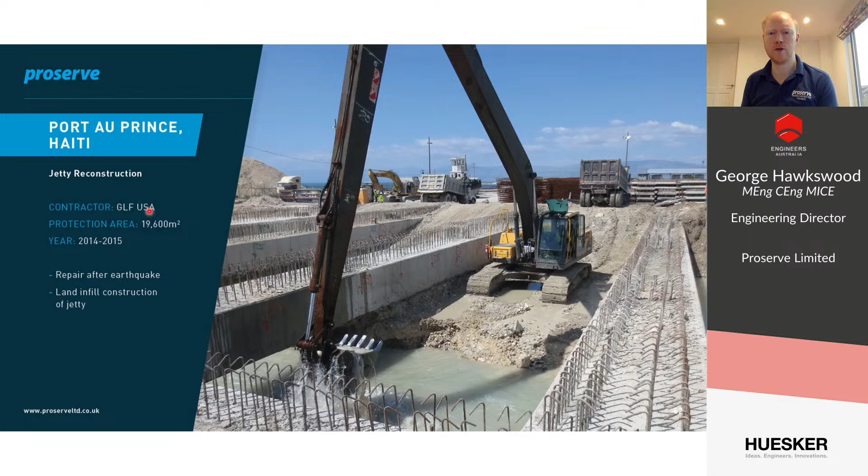So where have we done this before? Well, after the earthquake, we were involved in the rebuilding of the port in Port-au-Prince in Haiti. This used the land infill method, so piling on a land berm and then dredging of the slope. It was simple to float out the fabric, pull it out of the bundle connected to the piles, achieve this profile with the seal protection.

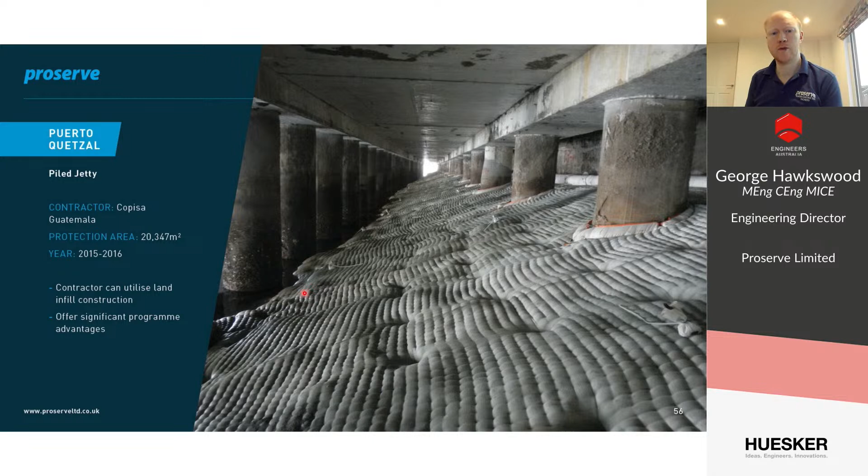We've also undertaken a similar project in Puerto Quetzal in Guatemala. This one was concrete piles, not steel piles like Haiti. So you can install it with raker piles, etc. as well. Here you can see part of it was above the water line, so you can see the porosity holes incorporated there for the wave action.

Here's a demonstration we undertook on the pile seal to show that it sealed tightly and maintained the stone and sand that's going to be on the slope underneath the mattress in location.

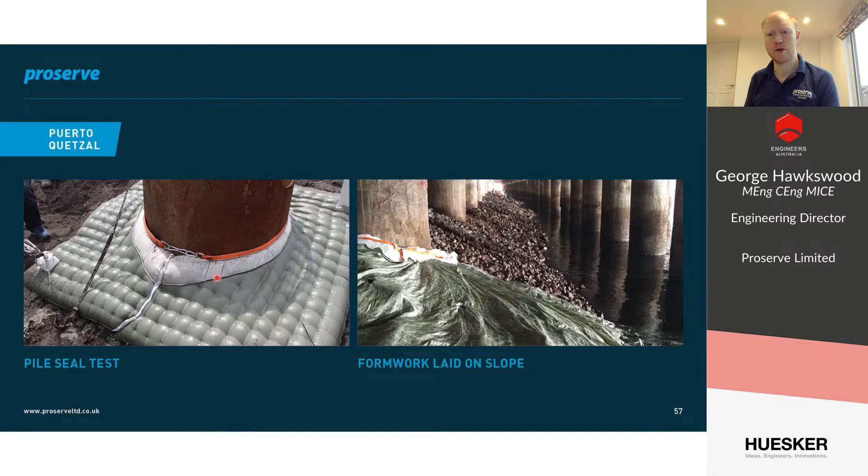So just to summarize the advantages of using concrete mattress on these two applications, for a quay wall or a level bed berth, then you're protecting the passive wedge. The concrete mattress can be approximately 7 times thinner than the equivalent rock armor. And if you wish, you can use your existing structure, deepen the draft, and install the concrete mattress, or for a new build, you can have the savings on span height.

For a pile jetty, it's the only method that can be reliably installed under the deck, meaning it can be retrofitted to existing structures. We can bespoke position piles if they're a bit all over the place, on older structures. With good survey information, we can cut the holes in the mattress in the right place, so you can use it on existing structures. Or you can use it new build, and the contractor can have their program savings and get their client into operation a little faster.

So just to summarize, we've given you some new knowledge. So how can we help you to provide the best solutions for your projects?